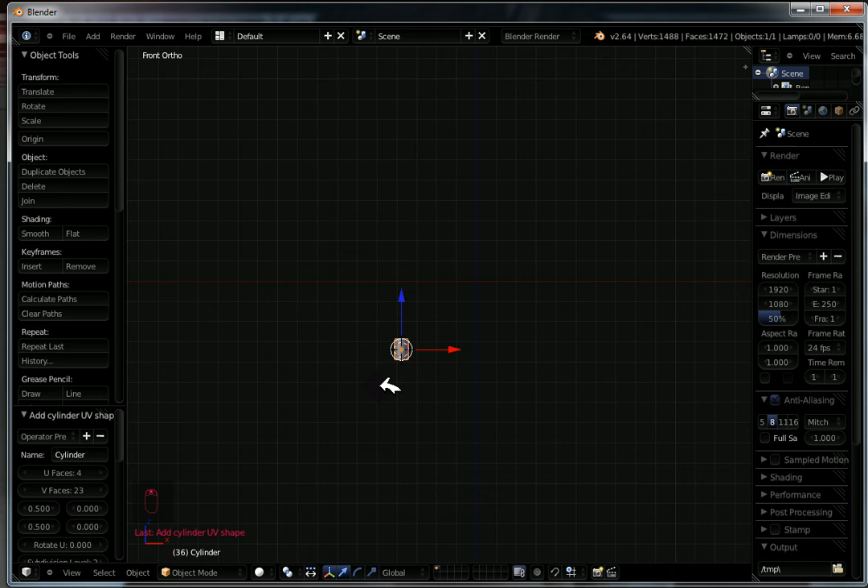I'm going to take this down to only 4 faces on the U, and take it to 23 faces on the V. So that's up and down, and this is side to side. And now when I come in here and edit it, you will see that I have 23 faces here.

And that's what I need to make 5 equal parts with one face to each one of them going up and down. So if I were to make, let's say, a table, 4 legs and a tabletop, I would need 5 pieces. And those 5 pieces can be broken apart with just this.

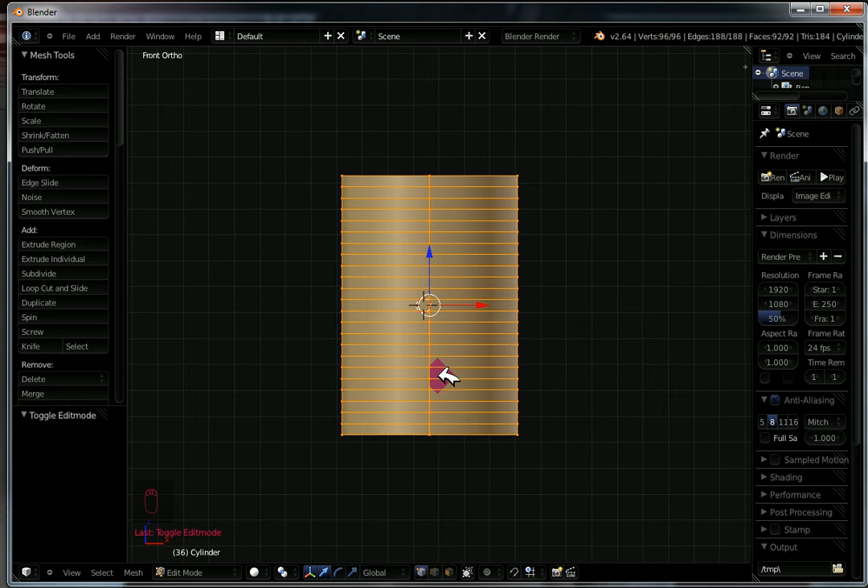Now I did 4 sides or 4 faces on the U so I could have a square, except when you look at this, because it's a sculpty, there's a subsurf involved, and you get this rounded look. So how we can change that is with the whole thing selected, hit Shift and E, and that will crease it out for us, making it into a square.

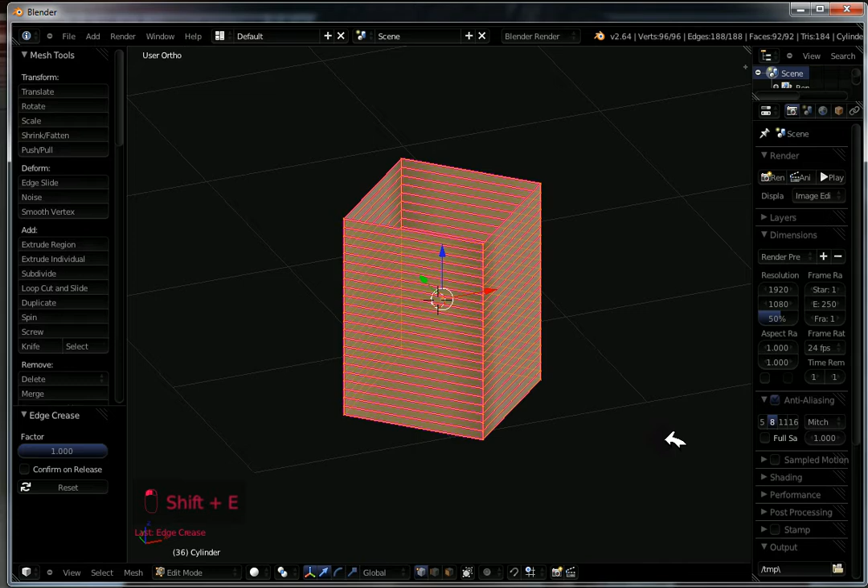Let me do that a little slower so you can see how that works. So Shift E, and then when I pull my mouse slowly out, it creases it. Perfect, there we go. So let's go back into front view mode, and this is what we have.

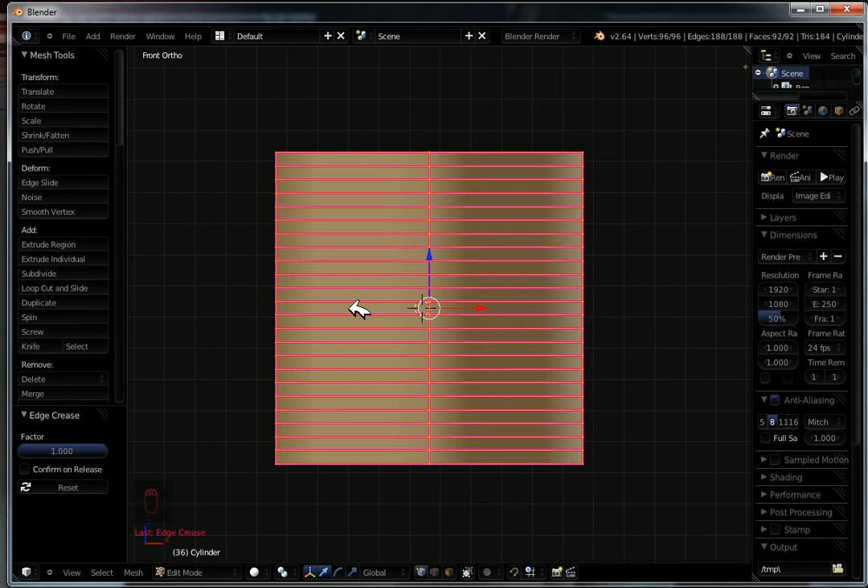So now to get the pieces to appear separated, the first thing I should do is close off the end. I'm going to Alt and right mouse click on it, S to scale, 0, because I want it all to go to the center of those 8 or 4 vertices, and hit Enter to confirm. Since I have them all selected already, I'm just going to grab them and put them in line with the bottom row. I'm going to do the same to the top - scale it down to 0, and then move it down like that.

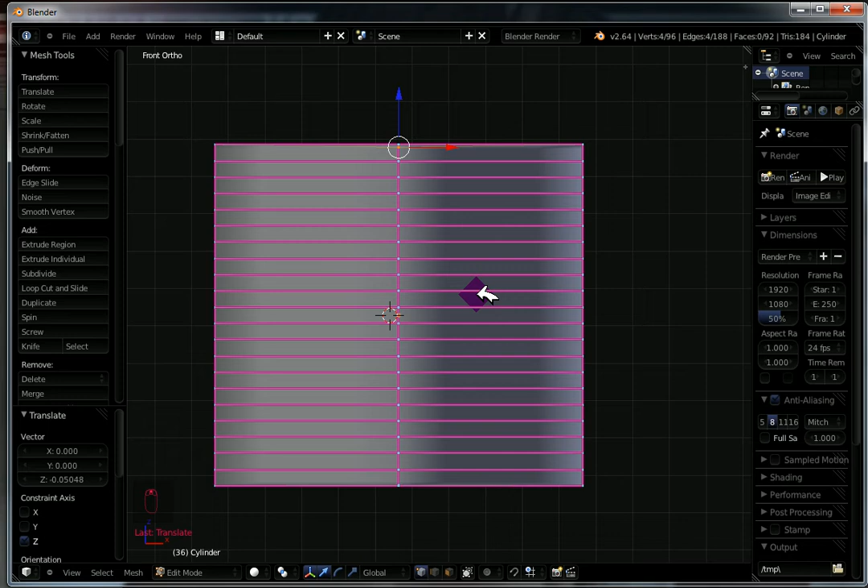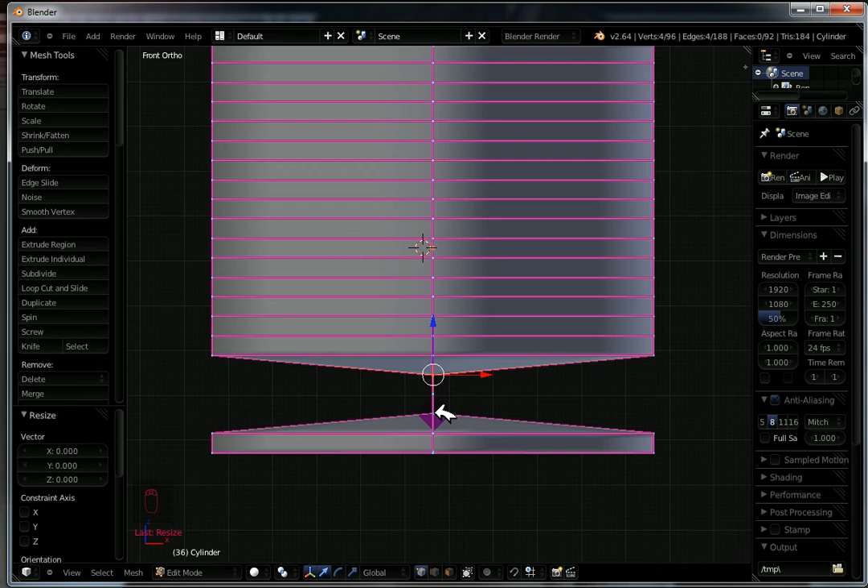Okay, so now here's the part where we make things so small Second Life can't see it. I'm going to choose this row of vertices up here, this edge loop, and scale that to 0. I'll choose the next one up and scale that to 0. And I'll do that a 3rd time. You do need 3 of them done to give you a really nice clean break, and you need to do each one individually - don't think you can just grab all 3 and scale to 0 at once. You can't. You need to do each one individually.

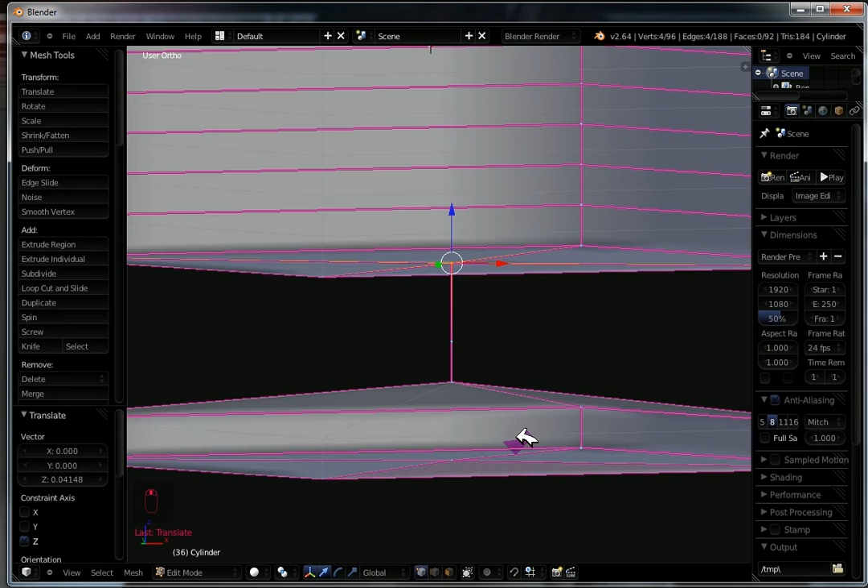Now, where this was easy to move up into place, it was easy because they were all selected. And this one here is easy because it's selected. But let's say I didn't do this one while they were all selected - well, I have to be extremely careful here now. If my occlude is turned on, this button here, and I go to select these, I won't select them all.

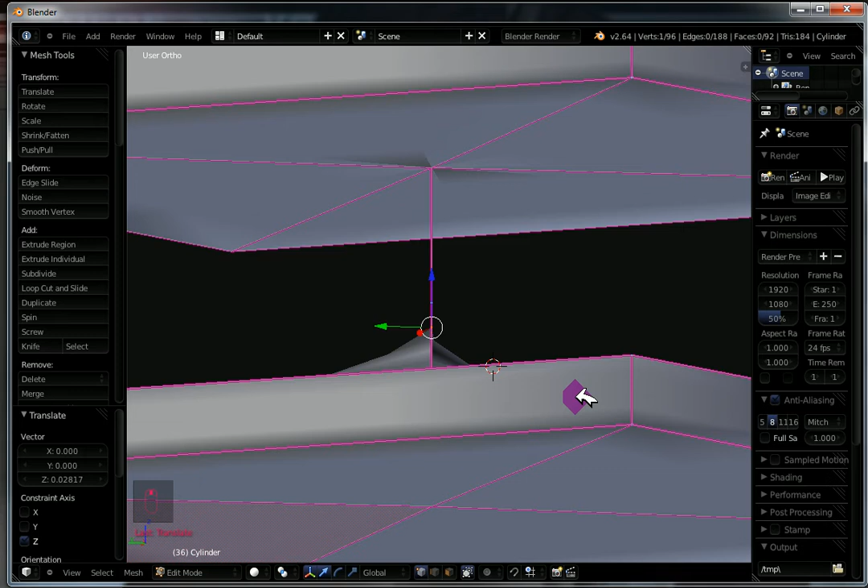Let me go ahead and show you, because with occlude turned on, you're only grabbing what's immediately facing you or in direct view of your camera, so you don't choose them all. And if you don't choose them all and only move 1 or 2 of them, you break this end apart and no longer have a nice clean fractional sculpt. So let me show you how to do that instead - you need to make sure your occlude is turned off. You can then see through your prim. Can you see, like here, the edges that are behind the faces here?

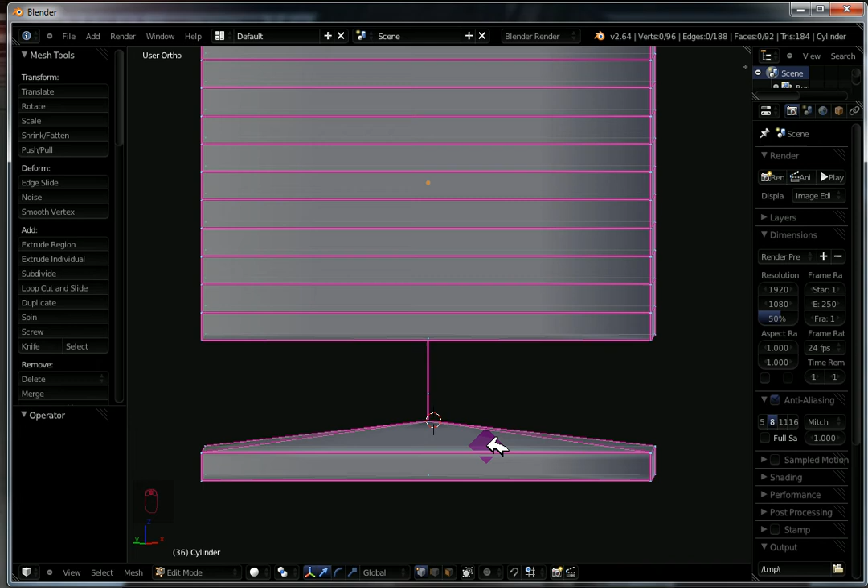That means you can see through it. And if you can see through it, then you can work through it.

So now, making sure that I have nothing behind this selection so I don't grab it by accident, I'm all set. I'll border select, grab those, and pull them down into place.

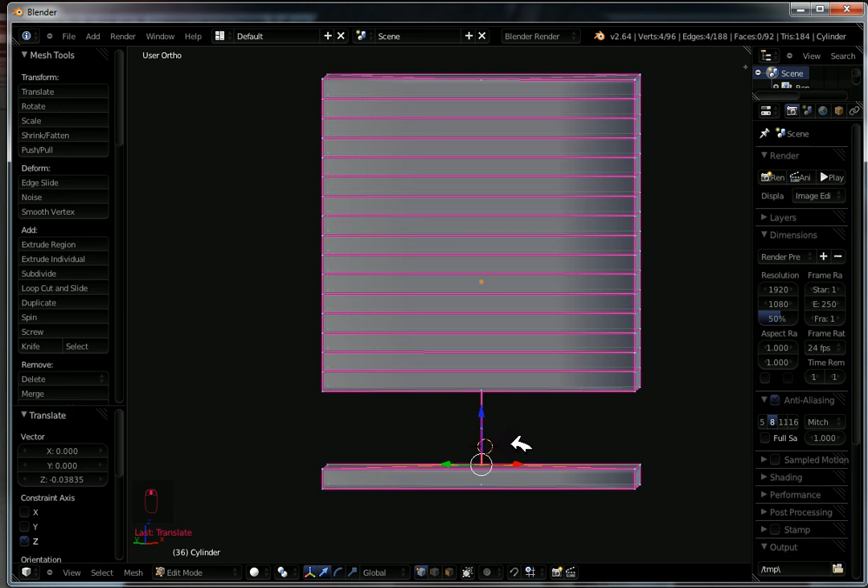So then the next thing that I want to do is I want to have this be its own piece. So the process is the same. The next 3 edge loops upward, I scale down to 0. And I did it again. I should have done this one.

So now I have to make sure my occlude is turned off. Border select just those and move them down. And that should be good.

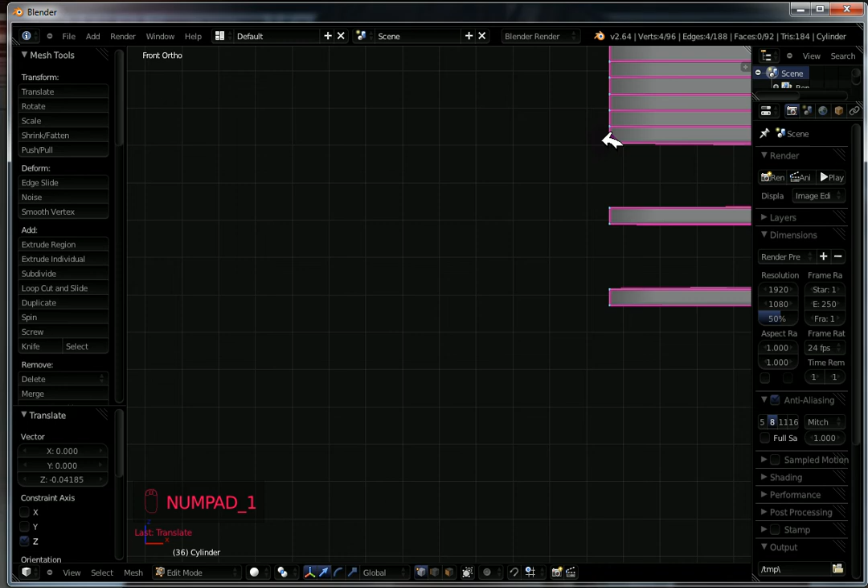And let's get that back into view. So I would just keep doing this. Scale to 0 and then move it down.

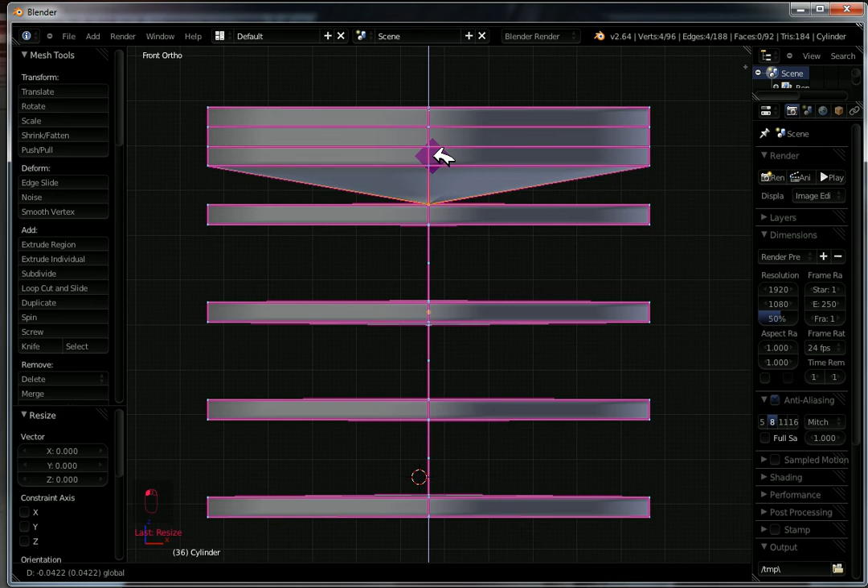Scale to 0, leave that one where it's at. Scale to 0 and move this one up. Scale to 0 and move it down. Scale to 0, leave it where it is. Scale to 0 and move it up.

And now I have literally 5 separated pieces. Or they look like they're separated. Now when you're going to be modeling these or moving these around or doing whatever you're doing to them, it's really going to be kind of hard with these strings in the middle.

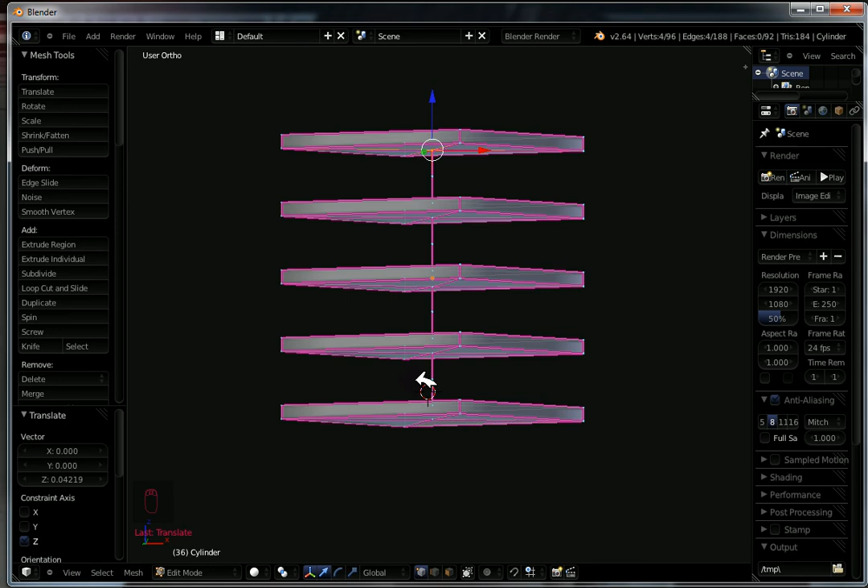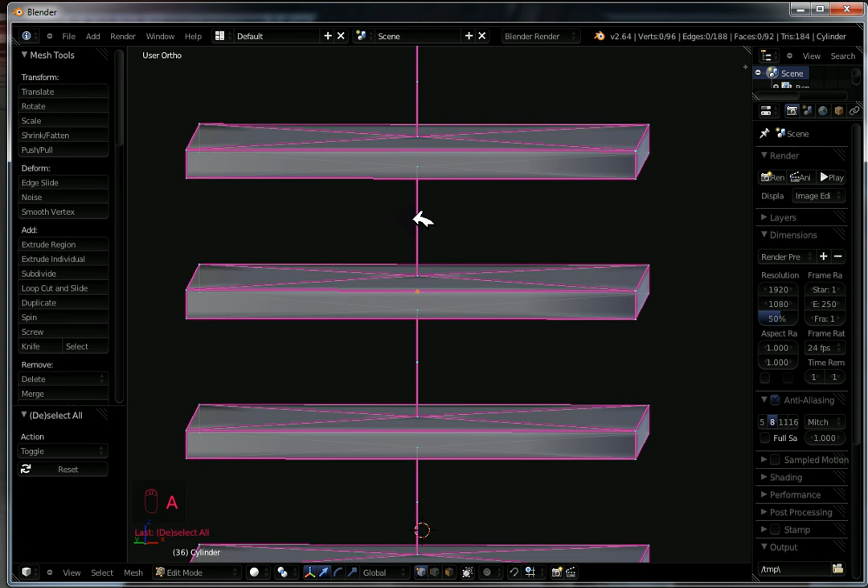So we can actually go in, select all of them, the 4 very center ones. You can't do the ends, of course, that are touching the part that you're going to be using. But you can get rid of those ones in the middle there. And I think I may have grabbed one too many, so let me redo that.

Border selecting just around those. And then delete key and choose vertices. Now I have something a little cleaner to work with, a little more friendly to the eye.

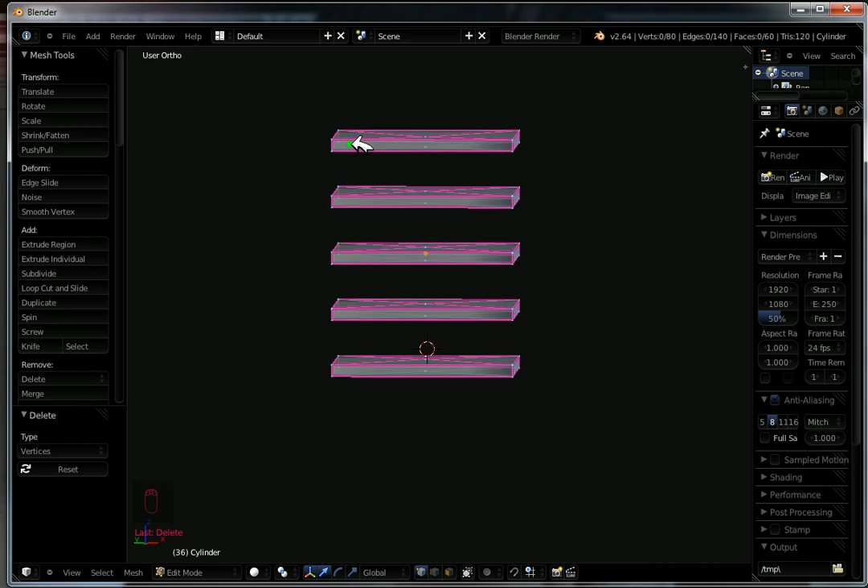So if I want to make a table, so simple. What I'm going to do is I'm going to take this top one. I'm going to border select the whole thing, and I'm just going to move it. Let's just move it out of the way for now.

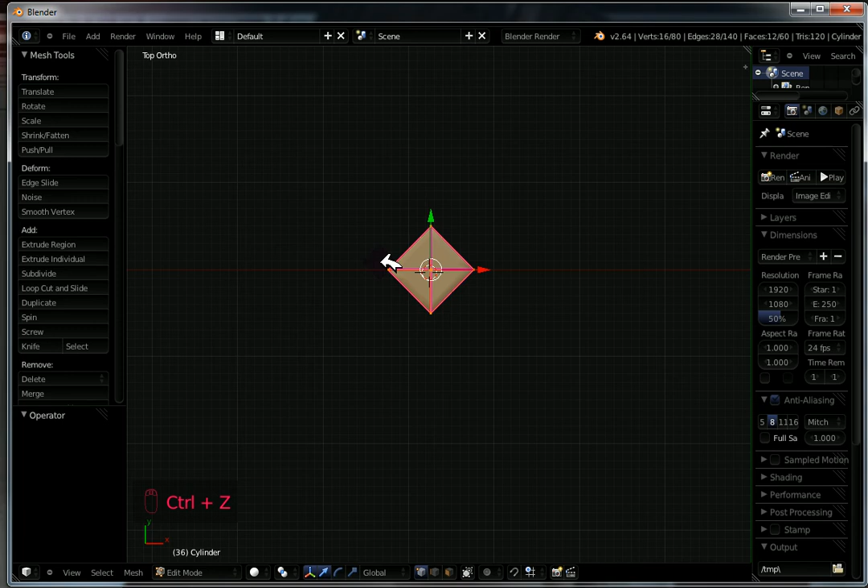Okay, so now I'm going to go into top view mode, and actually what we should do is grab all of this and rotate it by 45 degrees, minus 45 degrees. And so I have a nice square angle here and not a diamond shape to work with.

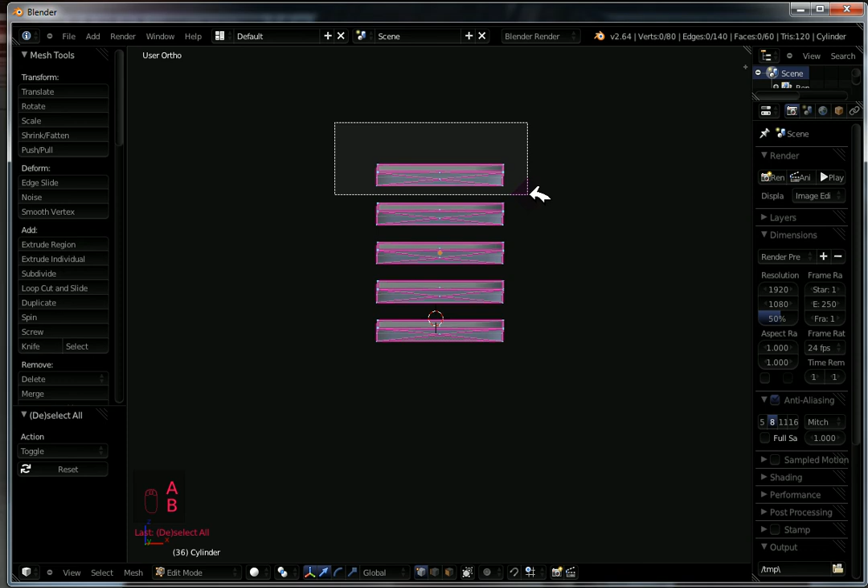Alright, now I can grab the top one, move it out of the way, go back into top view mode. I can grab and change the size of all these and make it look a much smaller square.

So I will border select all this and this, and this, and I don't have any of the middle selected. Okay, those are not selected.

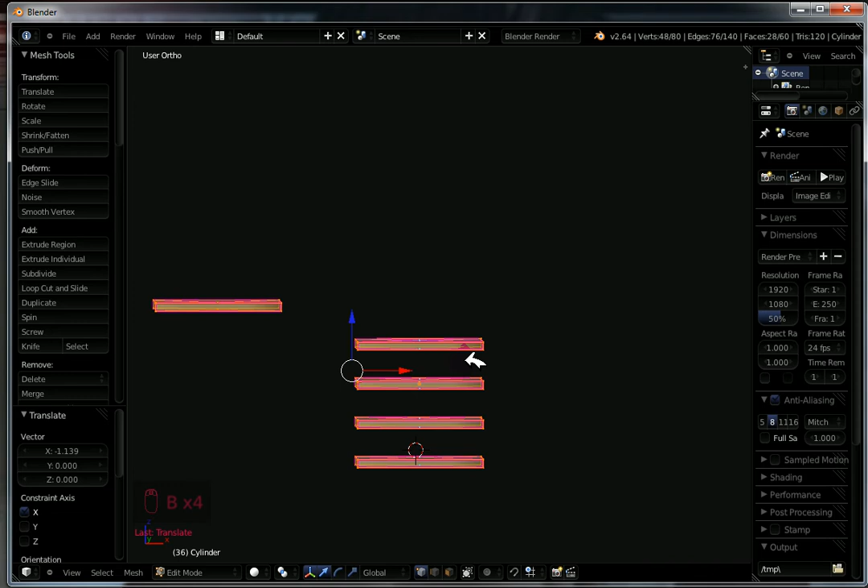And now I can scale them in on the y-axis and on the x-axis at the same time, and I can eliminate the z-axis by holding Shift and Z. So I'm going to S for scale, then Shift Z to eliminate the Z, and now...

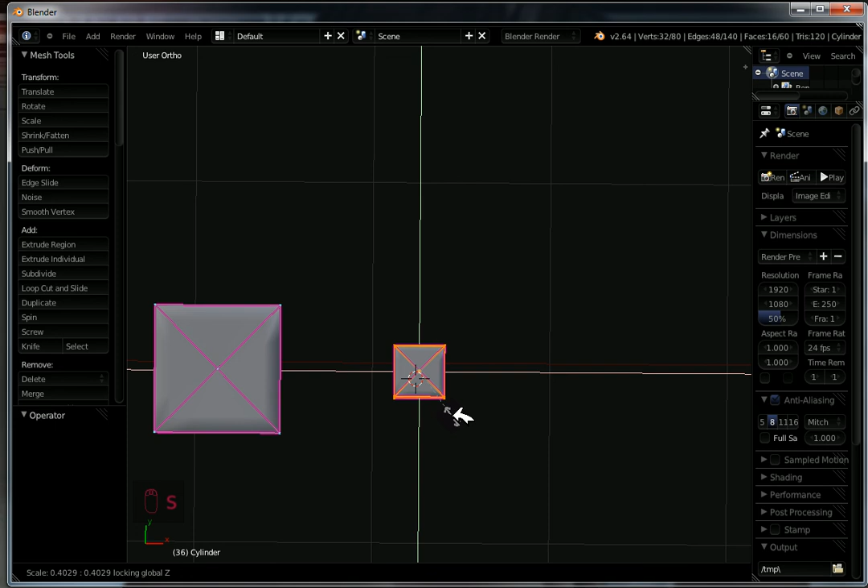Well actually I don't know why this was chosen. Let me deselect that over there. Alright, so scale, Shift Z, and I'm scaling those inward. Drop it, and now you can see how that was done.

They're all made smaller. Okay, now I want to go ahead and deselect everything. I'm going to move this one in line with that one.

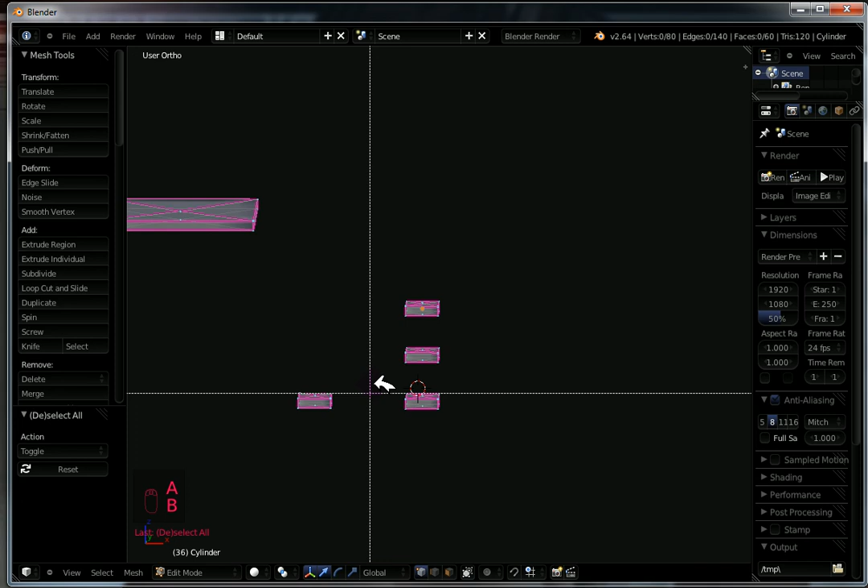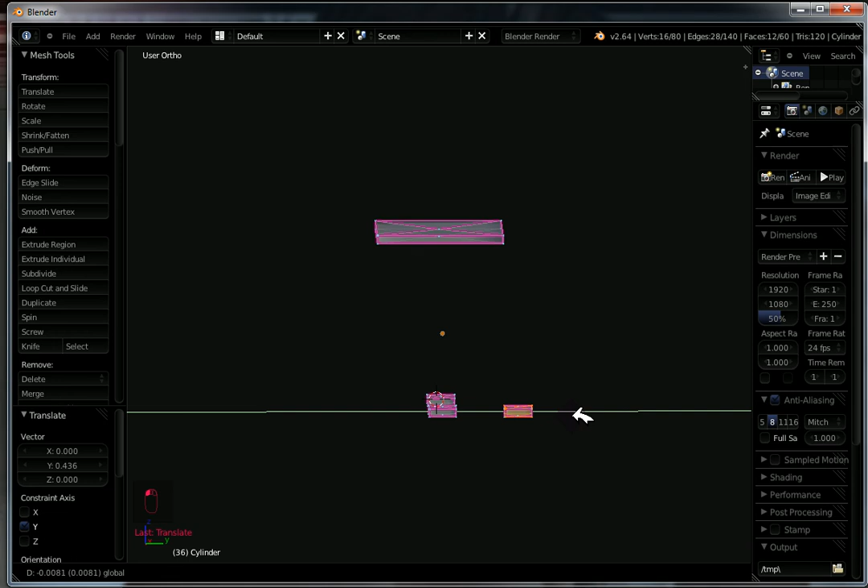Now you'll want to get more precise if you're making this yourself. I'm just kind of eyeballing it all for now, just so I can give you an idea of how it's done. And then choose this one, bring it down and back. So I'm just showing you a quick way to an idea.

And then over there, border select this one again, go back into top view mode, and let's say that that's pretty much where I want it.

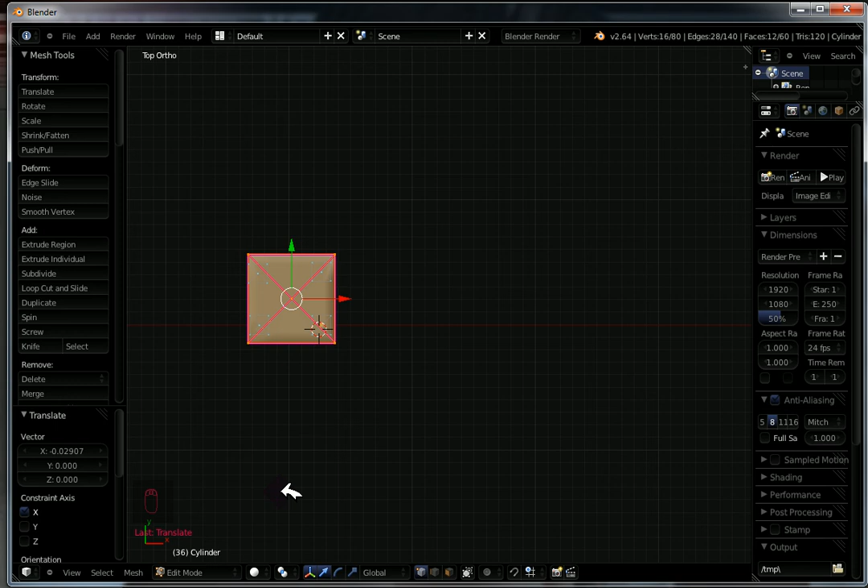Front view mode. And now I'm going to get a nice top front view mode here. And I'm going to use my border select for the top half of all of this, like that. Just bring it up.

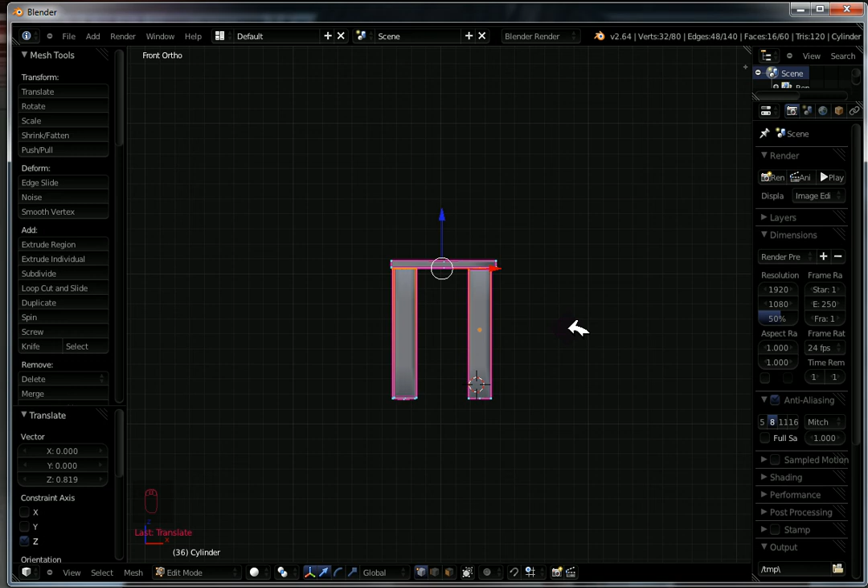And of course, I can always fix anything I want. Remember, I'm just eyeballing it right now. So, something like that. That's how you can get a table.

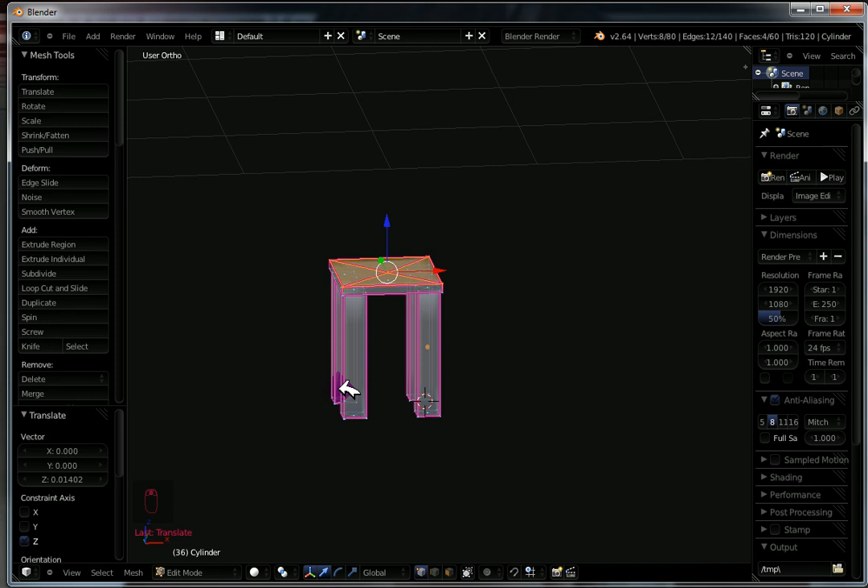And then you can work your textures, of course. That's a whole other thing. But you can see it's a table, and it looks like 5 prims, but it's 1. So have fun with it.